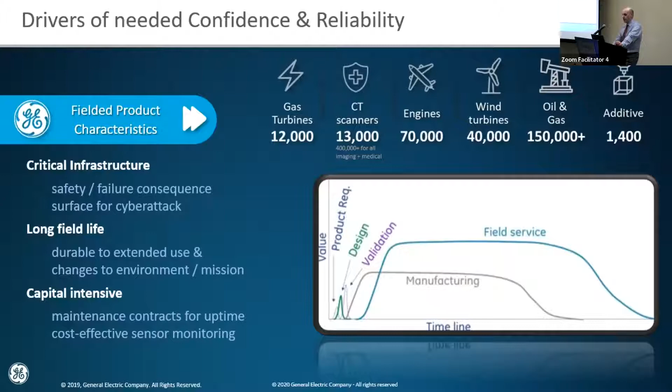These kinds of products are also part of critical infrastructure. So there are safety factors, they're regulated, they have a long field life and are expensive. So when they are not working, there are significant consequences. So we have employed modeling and simulation for a significant amount of time. It is very important, of course, that these not be garbage in, garbage out kinds of models because of the long life, the high consequence, and the critical infrastructure of them.

So I'll talk through how we got to where we are. And we mentioned that one of the ALCC awards that'll be using Frontier is on one of our projects. And I follow these 3 phases: to see, to understand, to predict.

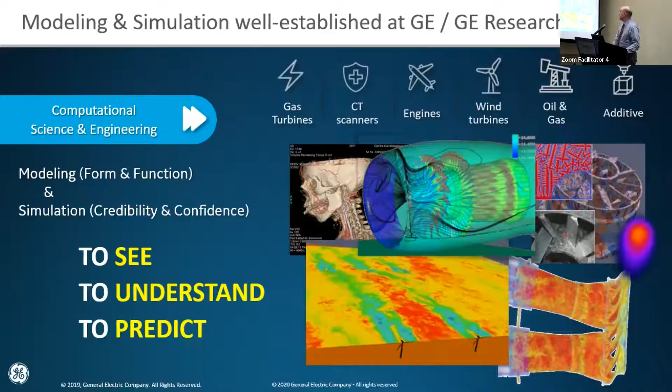Can you go to your second screen and scroll over and close the black bar on that?

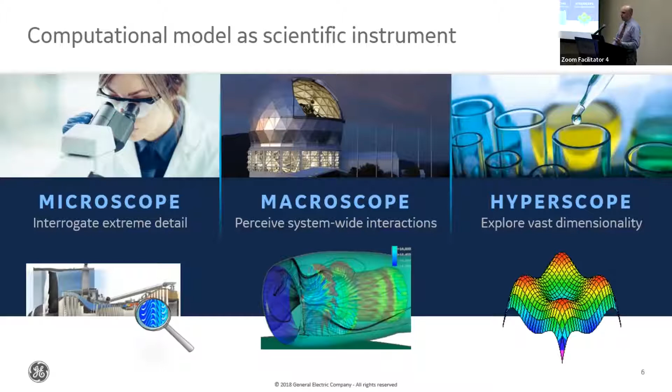All right. So when I say to see, I'm talking about using the computational model as a scientific instrument itself, the same way we'd use a microscope or a telescope, or what I call a hyperscope here, to look at massive dimensionality in ways that our own perception is inadequate.

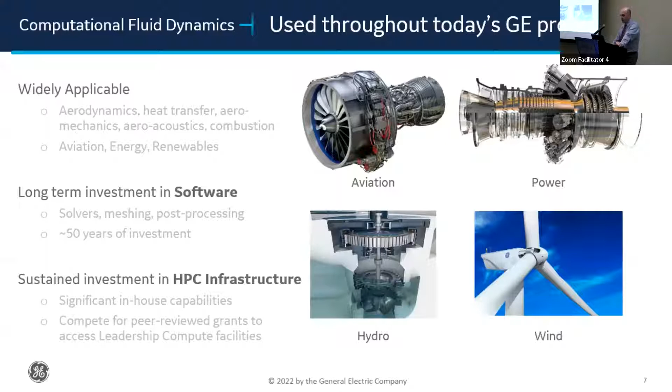And our studies and progress have mainly been in the swim lane of computational fluid dynamics, which apply to, in fact, all, one way or another, of our remaining products, whether it's jet engines, power plants, so gas turbine, hydroelectric, wind, and such. There's a high interest in understanding turbulence and its effects in the operation of that equipment.

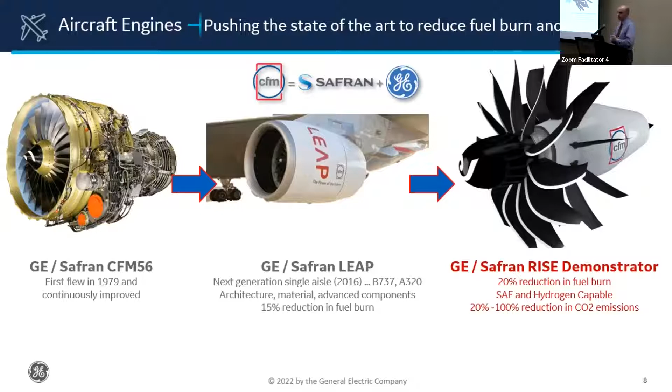Specific to aircraft engines, we have a program that you see on the right here called RISE. I'll talk more about that. That is the successor to 2 very successful engine models. The first on the left there, introduced in 1979, was one of the most used engines in the world, and the LEAP replaced it in 2016, reducing fuel burn 15% from the prior, and we have some very aggressive goals with RISE.

Now, one of the important aspects of this to understand is this is seen as a path to hydrogen. And hydrogen has been one of the priorities that the Department of Energy has declared. But to get the benefit of the zero carbon emissions out of hydrogen as a fuel, there are things you need to address. Right now, in how far you can travel at a given price, hydrogen is significantly more expensive than jet fuel. To get the same number of joules out of it would require 4 times the volume of storage of the fuel.

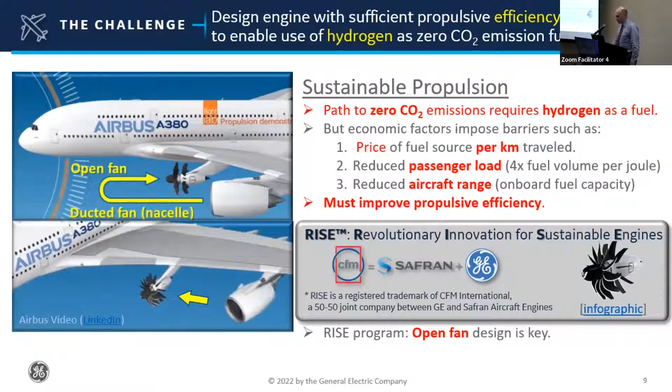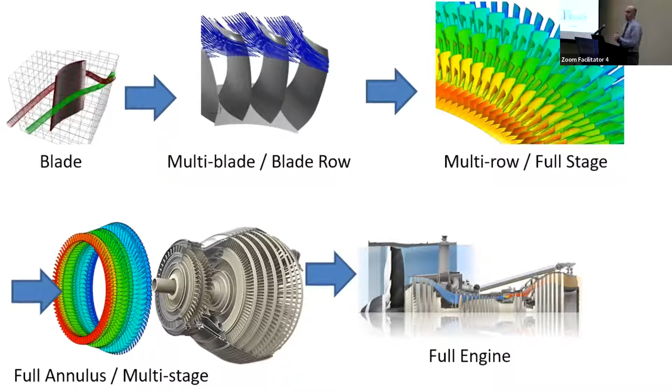Now, at any given time, we've only been able to simulate a problem as large as will fit on a given system. So at the beginning, we could only look at one blade at a time, then expanded it to multiple blades. And really what we care about in terms of the airflow is not the blade, but the passage between 2 blades where the air actually goes. So then we scale up to multi-row and full stages of the engine. We've historically used symmetry, like a 1/8 cut of the full wheel, then going to full annulus, which is the entire circumference. And then the dream would be to do a full engine end-to-end full annulus.

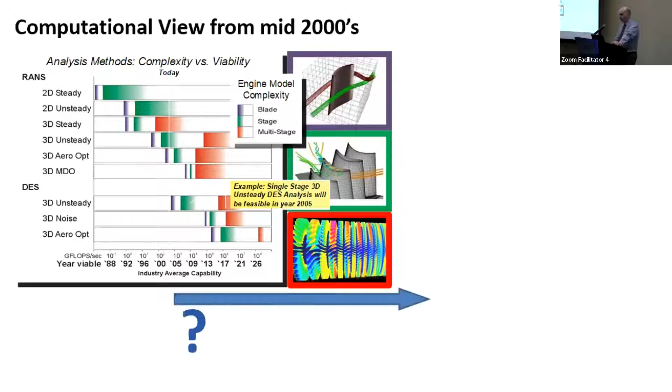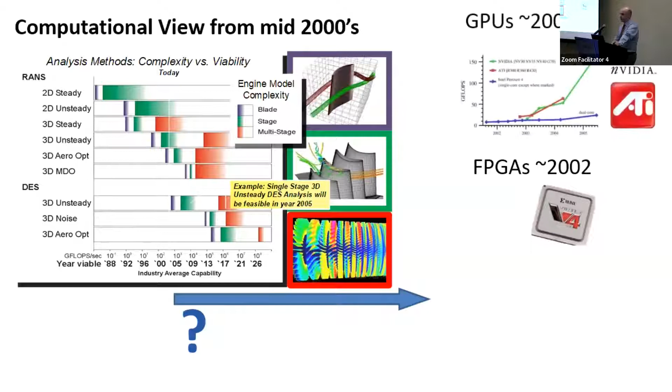But at the time, we didn't know what the path would be to be able to do these kinds of simulations. Now, the group that I was leading at the time was doing embedded systems. And so we were familiar with FPGAs, and we actually had done some CFD kernel implementation in FPGA in the 2002 to 2004 timeframe. There were significant increases in performance that we could get from GPUs. And then the PlayStation 3 was out, and we had the potential of looking at the cell processor.

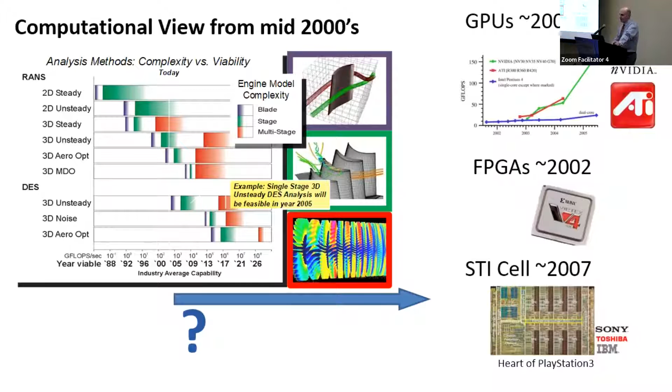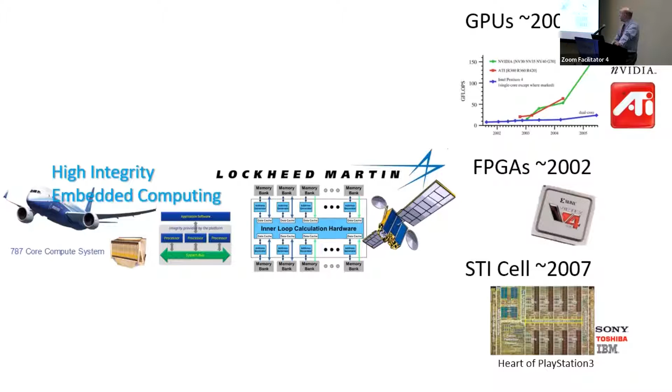Now, GE may have been fortunate in that our group had experience in doing high integrity embedded computing, like the core compute system for aviation, onboard satellite systems and such. So we were using FPGAs for that platform, and we're quite comfortable implementing those, although the process chain was significant. Because of image reconstruction in healthcare, we were familiar with using GPU acceleration.

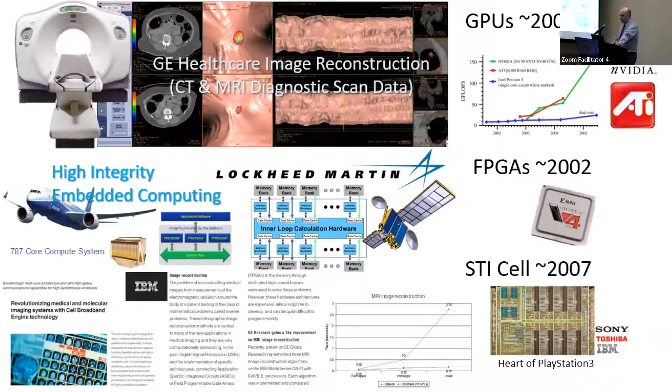And we were actually early in on the STI cell. This article in IBM publication talks about some great performance that we got for it in doing an MRI algorithm implemented in the cell processor. So before 2010, we were already kind of pre-ready for this use of accelerators to get performance, but we had only looked at these in embedded or single workstation kind of scenarios.

Our x86 clusters were modest, and in the high reliability architectures like the Blue Gene, there was a perception that it would be very difficult to port to them, but we got some assistance from Jim Sexton's team at TJ Watson. And I think our port of Tacoma, our RANS solver, took a day. And so that put that to rest. And we were running on the Blue Gene L in Rochester, and then some of the performance improvements started.

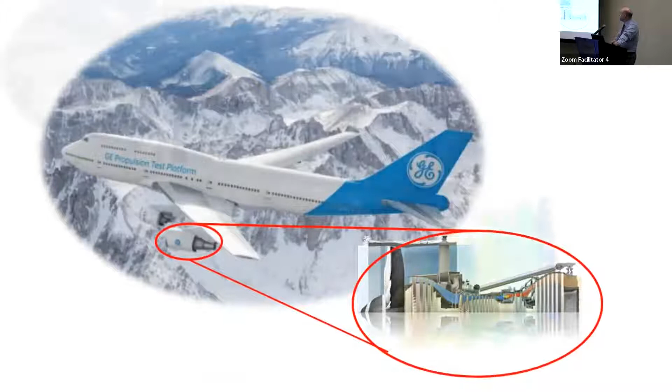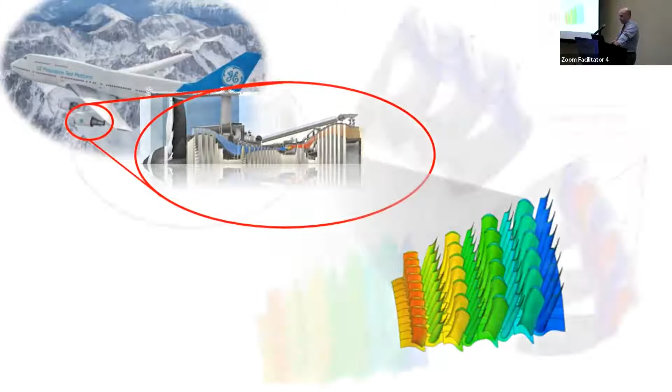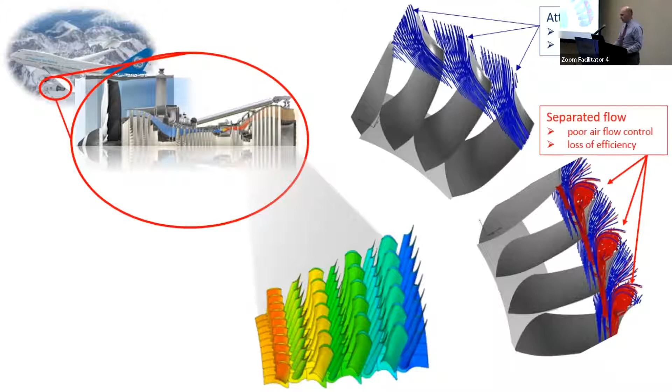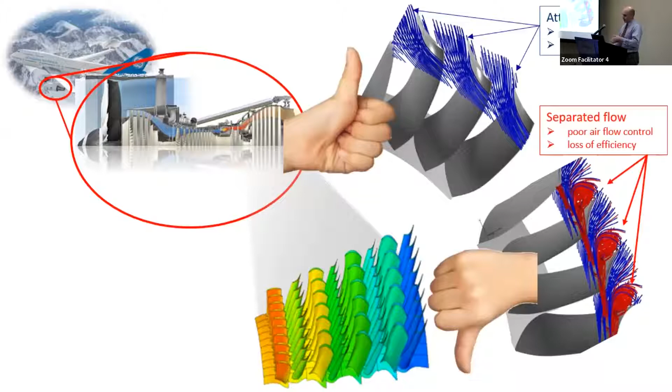So let's go back to the engine here. So the last part of the engine called the low pressure turbine is where we capture all the energy that's being generated upstream. And if we can choose a design that maintains attached flow as shown toward the top, we get high efficiency, whereas with turbulence, as seen in the red, and separated flow, we lose efficiency in the design. And so we run simulations where we want to see if the shapes and other factors that we've selected are creating these kinds of flows.

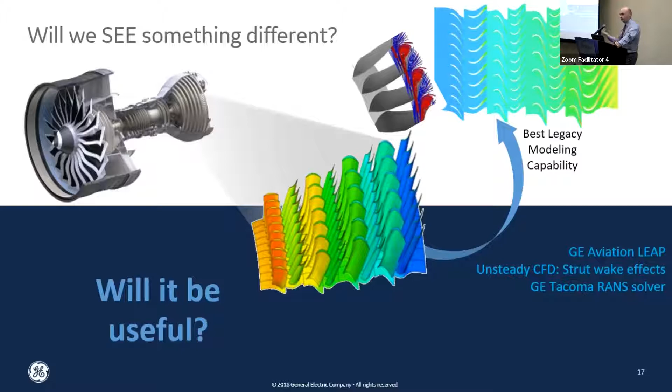And so we wanted to run a Jaguar experiment on this to see if there was anything useful running unsteady computations instead of the steady, which you can see up at the top, which is a time averaged view of what's going on in that stage. So we took this to Oak Ridge, and on Jaguar, we ran an unsteady analysis, and you can just see by comparison the top and the bottom.

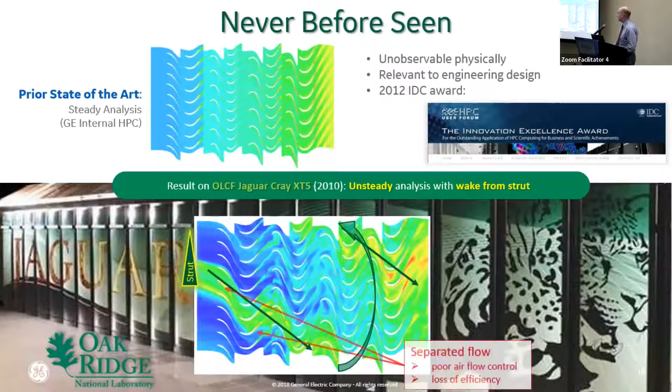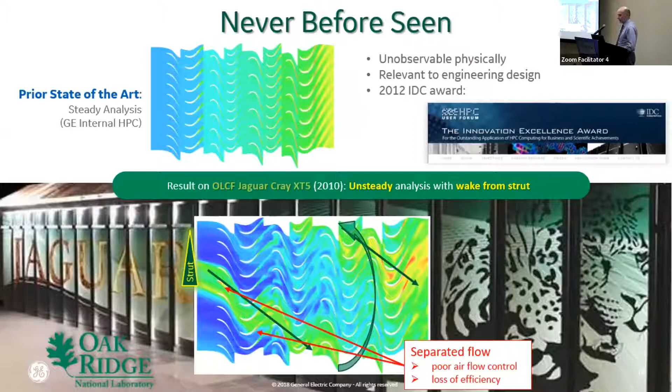What we have here is there's a strut, and behind that strut is this wake, and we thought there's thousands of RPMs going on, that's just going to blow apart the wake from that strut. Not true. With the unsteady analysis, we could see that the strut was impacting things, and we could identify areas of separated flow. And because the initial row is a stator, not a rotor, meaning it is always behind the strut, there were actually design decisions that we could make to compensate for this. So this was seeing something that we couldn't see before.

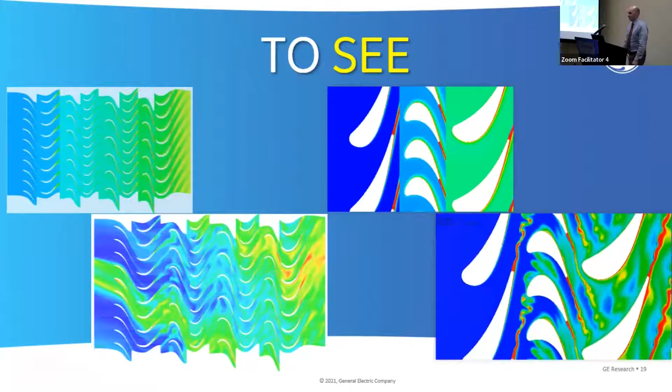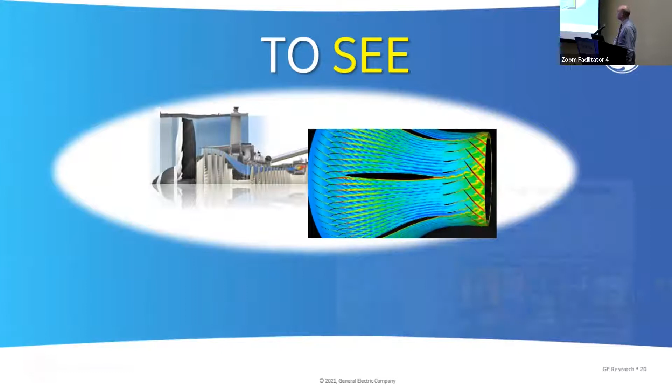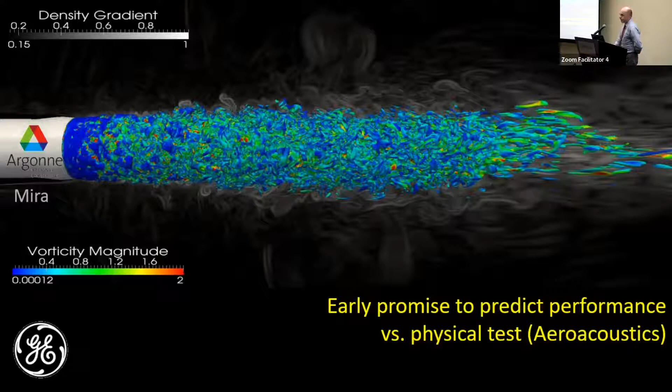So imagine you can use the top half of the slide to design, or you can use the bottom half of the slide, which is more informative here. And this has even gotten more pronounced as we have expanded the scale. So in 2011, we acquired a Cray to be able to do proprietary problems on this. Another early project that was very enlightening, this one done on Mira at Argonne, was in exhaust noise prediction. This was some of the first work that was reproducing physical test data predictively. And this leveraged a code out of the Air Force.

So as far as Exascale, this is a panel in 2011. It was in the basement of the Capitol where I was representing industry, and we didn't really have an Exascale problem at that time. So I'm thinking, what can I actually say? So I changed it to the pursuit of Exascale, and how important the pursuit would be in impacting things where, just as petascale would commoditize terascale and make it affordable so everybody can do terascale stuff, Exascale would do the same with petascale.

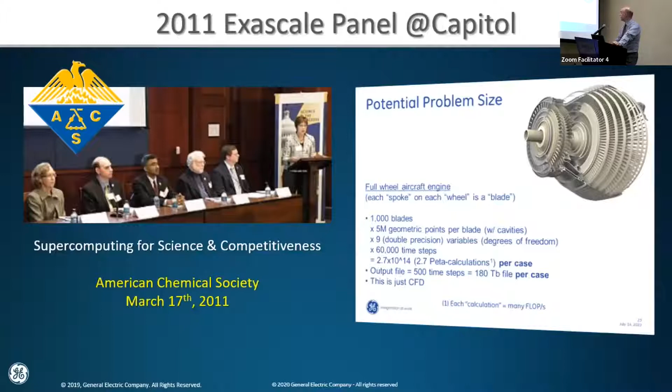But I did add an Exascale-sized problem, but this was completely infeasible to generate at the time. And the barriers in creating industrially relevant problems in terms of the mesh size and detail and validation and such are still an obstacle, and something that I've reached out to several labs to discuss how to address. And I think it's a problem worth more attention.

Another early success story, unfortunately it's a negative success, is in looking at the nucleation or the formation of ice in water droplets. And the interest here was in terms of ice adhesion to things like wind turbine blades, aircraft engines, even subsea oil exploration contexts. And strangely enough, how this actually works mechanically, even though this is something we see all the time, is not deeply understood. And so this was one of the largest scale simulations in the world at the time, and it did give insight. Unfortunately, it was insight that the countermeasures that we were looking at to reduce adhesion would not work.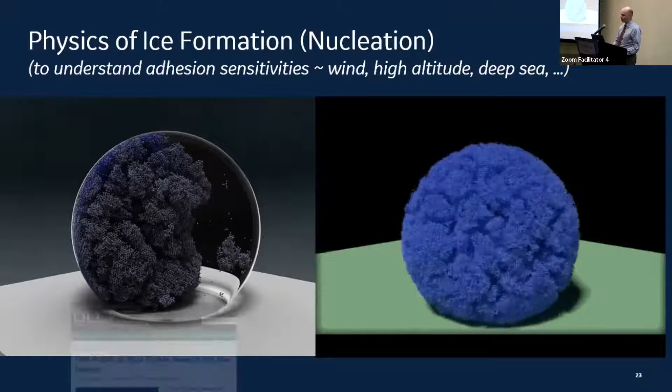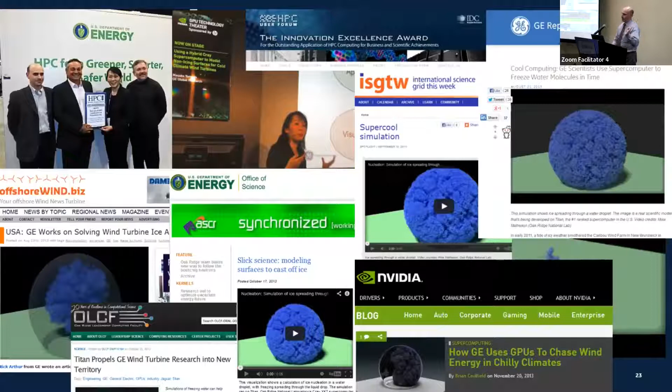But it allowed us to create a lot of interest and excitement around the ability to see this and then redirect our resources elsewhere. And in fact, that story is in the case study that Masako Yamada wrote in conjunction with the brief history, up to this point, that we put into this book that came out in 2015.

So this is kind of the glory slide. Over the years, we've had a number of projects at various labs that have touched on many of the different components within the engine. An earlier version of this appeared at National Lab Day on a live screen. And I think it's a great visualization showing the partnerships and just the power of what you can see.

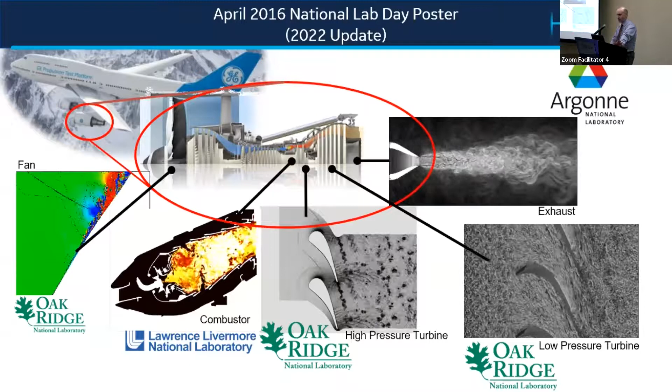So shifting from seeing to understanding. The story that I would next share is around gas turbines. So this is big. This is 500 tons, 39 feet long, 16 feet in diameter, 100,000 parts. We are the largest supplier of gas turbines in the world. And so efficiency on these is of significant impact. And along the way, you also want to reduce emissions, carbon dioxide, NOx, and to a degree noise. Noise will come into the story here.

So while a gas turbine only plant is about 33 to 44% efficient, when you do what they call a combined cycle, where you capture the heat and turn that into a steam turbine, which acts in conjunction, you can push that into the mid 60% range, which for a machine is an incredible efficiency rating.

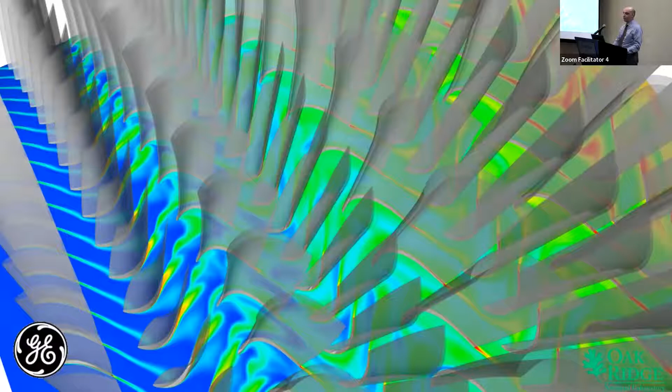So each percent of efficiency translates to 17,000 metric tons of carbon dioxide, or about 3,500 automobiles. And the US combined cycle fleet is about 200 gigawatts. So 1% on that is about 3.5 million metric tons of carbon dioxide. So this is a single point with dramatic potential impact.

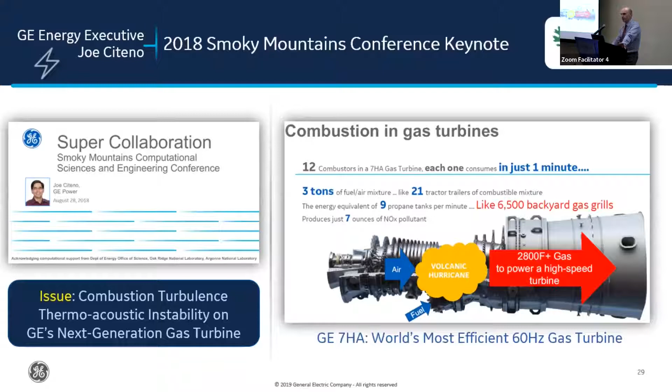So a great story here is one that was told by Joe Citeno from our gas turbine team in the keynote at the 2018 Smoky Mountains conference, where he shared the story of outreach to the national labs toward a predictive model that would have sufficient scale and capability to simulate the system of interest. The problem was, before having access to these machines, we could only look at one combustor at a time. But there was an interaction between multiple combustors that was creating some problems in the design that we would only be able to see once we were able to simulate multiple combustors.

And so we received assistance from the labs, and you can see in this diagram, at least that they look different, not being a mechanical engineer, from the unstable to stable. The design change was moving one hole, a fuel hole, by 0.1 inch. So having the ability to see this and understand the impact is a key part of the value that comes out of this.

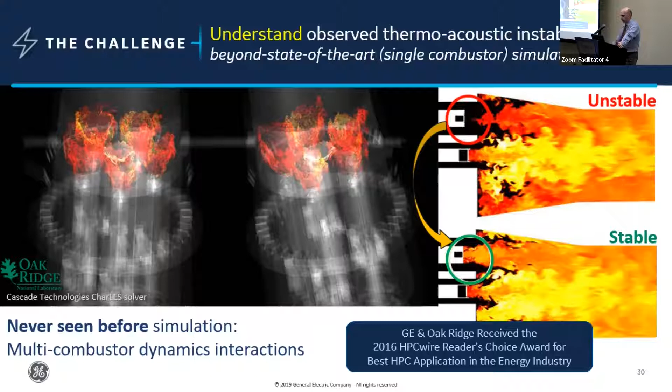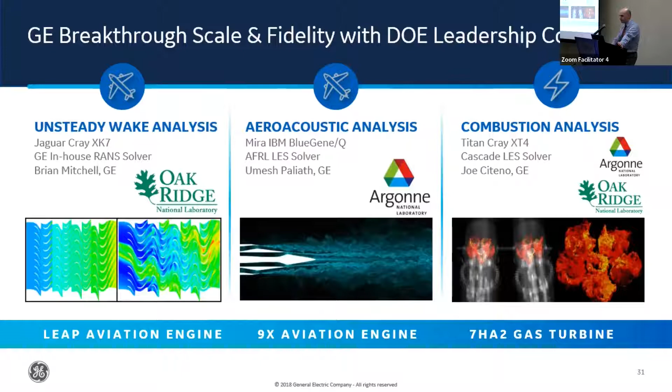So we had started to build this portfolio of great projects with impact. And I definitely would say Susie and David in the back of the room were key partners in getting us engaged and making parts of this happen. So, now bought in, we started expanding these partnerships. This was looking at wind farm scale simulations to start to get an inkling of the effects of wakes downstream, and we're going to come back to that.

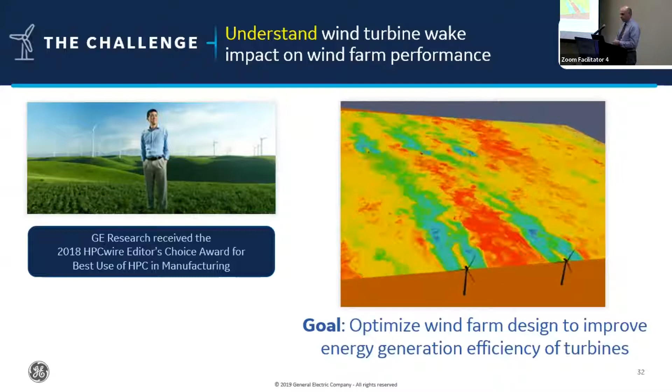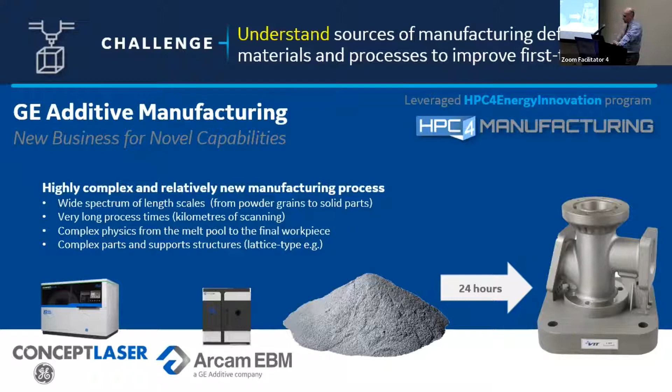We had additive manufacturing, which was becoming more prevalent. So you take metal powder and a laser that will melt it, add powder, next layer, next layer, next layer. And this became so critical to our aircraft engine business that we actually bought the 3D printing companies there on the left, Concept Laser and Arcam. And so now we're in the metal 3D printer business as well, with ourselves as our primary customer, but with others as well. So understanding materials and the grain structures in the process, and we've leveraged the HPC for Manufacturing program in looking at this.

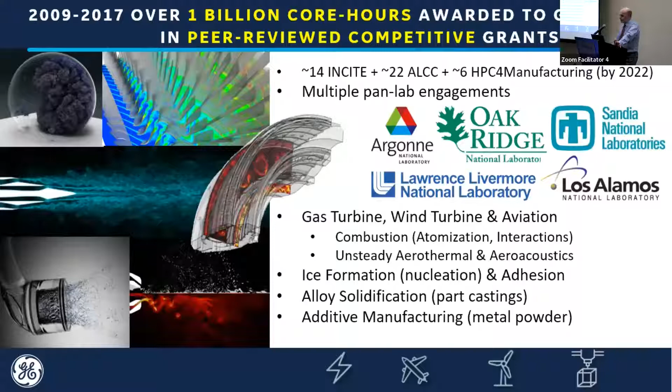So by 2017, in peer-reviewed competitive grants, GE had already used over 1 billion core hours on the National Lab machines across a number of the labs. And by today, that's 14 INCITE Awards, 22 ALCC Awards, 6 HPC for Manufacturing, and other directors' discretionary grants, et cetera. But we recognized all through this the obligations that we had also to give back and to keep pace with things like the INCITE scalability requirements.

In 2019, at the Exascale annual meeting, I put together the poster on the left, and this is just zoomed in to show some of the aspirations that we had for Exascale, including multi-scale wind turbine interactions, the inlet distortion flow. So this is where you have aggressive crosswinds to the flow.

So it's not like a uniform, I'm flying into a headwind sort of thing. And multi-scale material modeling. But this one here remains a big challenge, which is combining, once again, I talked about modeling just the combustor or just one combustor,

linking the simulation of the combustor with the simulation of the turbine that follows it. They have different geometries that they have to hand off, as well as different physics that are of interest. And so today, those are boundary conditions as a handoff rather than a coupled simulation, but it's pretty intuitive that there are insights when we can actually combine these.

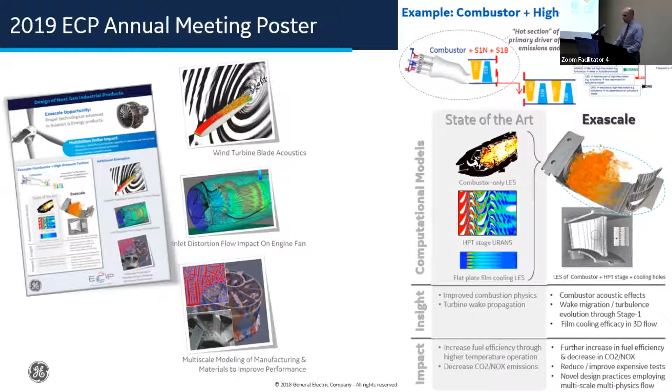So getting to the recent awards that we've received, this ALCC award, and this did have an update, so it was renewed, was looking at the impact of coastal low-level jets. So in the natural thermal cycles of the heating of water versus the heating and cooling of land, along the coast, there are these jets that have a distinct non-monotonic velocity profile that will hit the wind turbines. And it's not an effect that is universally seen, but it is prevalent in the East Coast of the United States.

So in the New York Bight installation that was going up, we wanted to understand these effects so that we could predict what the performance of the wind turbine farm would be, and understand the reliability of the operation and such. So that's one aspect of this. The other is in terms of the wakes now.

Believe it or not, the wake effects downstream can span over multiple kilometers and can reduce the efficiency of a downstream wind turbine up to 40%, and also potentially increase the out-of-plane loads on the turbine of up to 40%. And so a lot of the design is idealized turbulence, not realistic environmental conditions. And there is no wind tunnel that you can put a wind turbine in to do this. So this is the only way of being able to see these sorts of things.

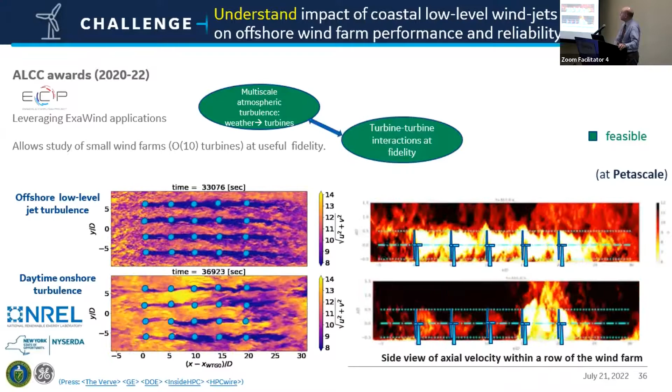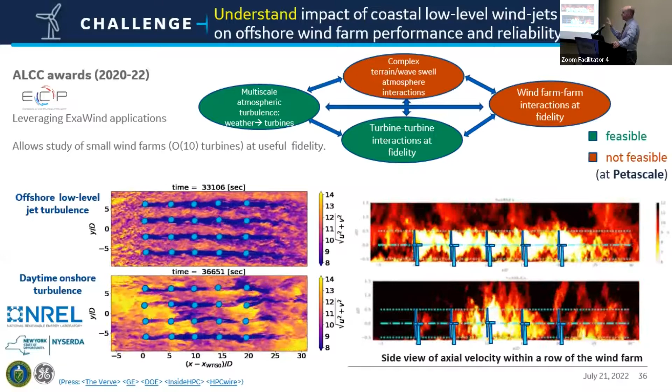So feasible at petascale, we have the atmospheric turbulence, the impact of weather on the turbines, turbine-turbine interactions at order 10, so basically a single farm, but still not able to do things like complex interactions with wave swells and more complicated atmospheric phenomena, and then interactions between wind farms, which, just put a pin in that for a second.

So switching to the predict phase here. So we're at this current status in the diagram with these infeasible solutions. But with Exascale, we believe that the wind farm interactions become feasible. So here, these are two wind farms in the Baltic Sea that are tens of kilometers away from each other, and the wake from one farm will impact the incoming profile of the other farm. And this greatly increases because of the number of turbines that are participating, but also the overall scale of the problem. It may also open up some of these other atmospheric conditions.

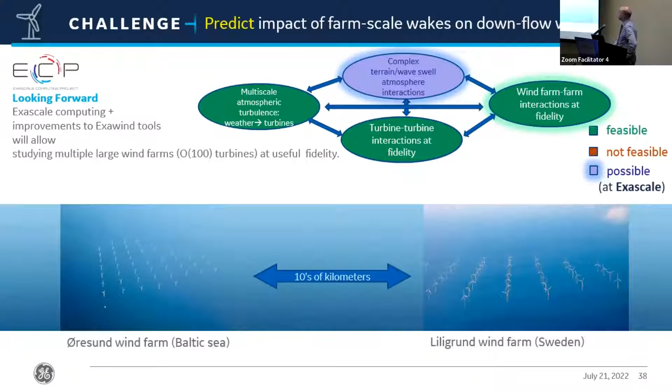The second ALCC program was trying to understand some of the flow physics that impact engine design and are relevant to the other stuff we'll talk about. So going from a laminar smooth flow to a turbulent flow, which would reduce our ability to capture the energy, reduce performance, and potentially create what they call flutter, which is a noise. It's like a standing wave in the system.

We needed to look at how far up do we push what's called a Reynolds number. The Reynolds number is a function of viscosity in how you're modeling the fluids. And especially if we were going to employ the results of these simulations as a training set for surrogate models, we needed to know if we were extending this into the region of sufficient fidelity to encompass these kinds of effects. So this study was just looking at what are those tipping points in terms of the sensitivity on that, and this is in the high pressure turbine.

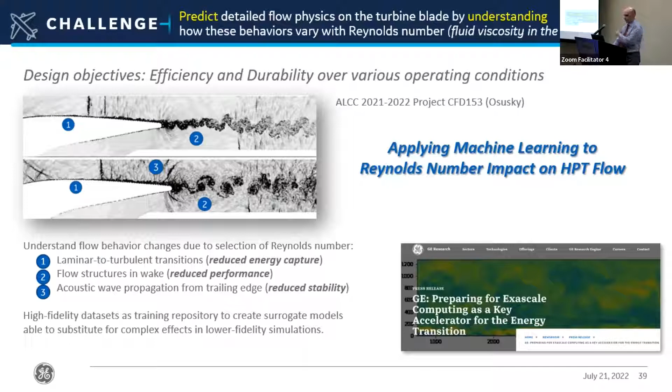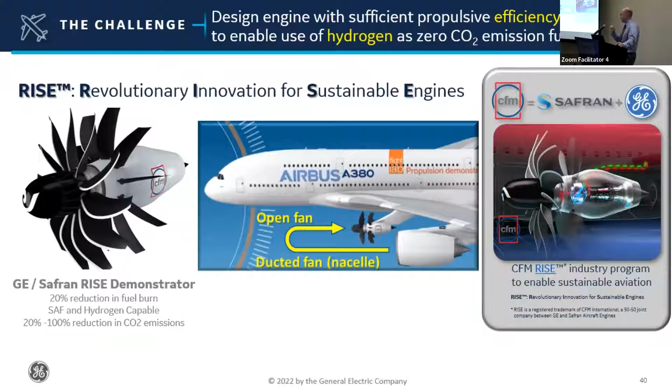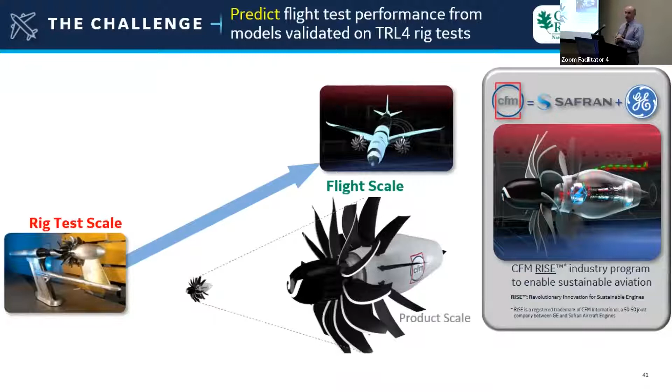And this is something that is probably not well known. So before we can run a flight test, we run a rig test. This is typically done in a wind tunnel, but these wind tunnels are smaller than the actual product. And this is how big a difference that is. Now, so we build this tiny version that will fit into NASA's wind tunnel.

And the relevant Reynolds numbers for the airflow of the small engine are significantly lower when compared to the fans that you see in the full product. So there is no wind tunnel that we can use to test the design at the product scale. So that is not tested until the flight test.

And we have to try to sell these things. So we need to at least bracket what its performance will be post-certification when we haven't even done a flight test and such. So we laid some foundation for this with the 2021 INCITE, and this completed the first of a kind, well-resolved large eddy simulations of the full 3D open fan at high Reynolds number. And this was still at rig test scale.

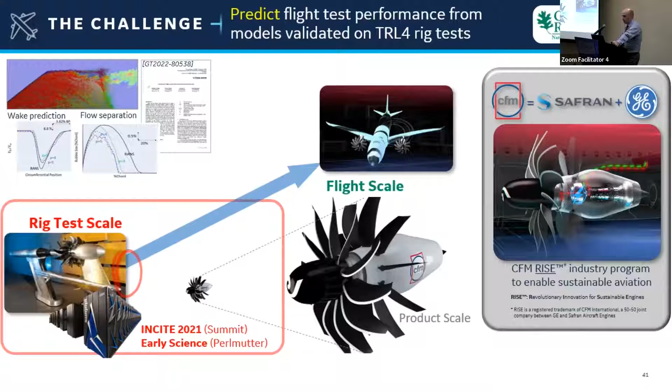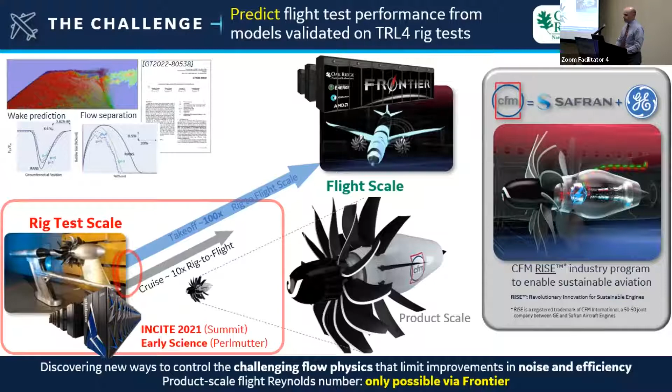And cruise is significantly simpler because it's more steady than takeoff conditions, which have a lot of dynamics to them. So if we wanted to perform these same kinds of simulations at the flight scale, we would need a much bigger machine. And this is where we approached Oak Ridge and ultimately put into the ALCC program on this proposal to leverage basically everything we could possibly get access to. And so the ALCC award was on Frontier and Summit and Perlmutter. And you can bet that if anybody leaves spare hours available, we will be eagerly seeking to scoop those up.

So just as a comparison, to run the takeoff test at the rig test scale, that simulation would be about 70,000 node hours on Summit. That same simulation at product scale, so the flight scale, is over 6 million node hours on Summit. So we love Frontier.

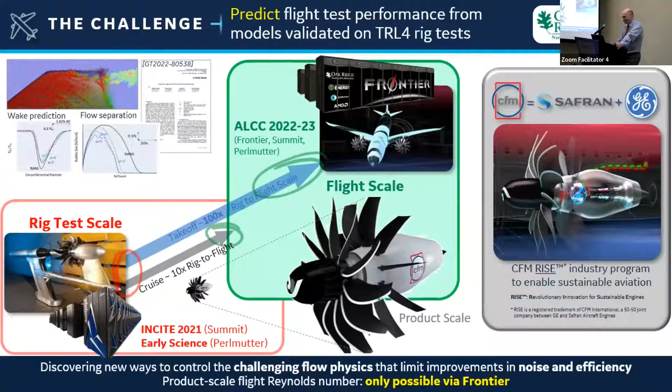The other potential approach for being able to leverage greater value out of this is thinking about the ability to save the results of high fidelity simulations as storage has become affordable and abundant. Rather than doing an optimization where we're just throwing out things that don't meet our objective criteria, we can keep those results, because maybe our objective criteria are wrong, and employ that as a data repository for machine learning for surrogate models. However, that repository needs to be very precise in where it is relevant to use. And if it is insufficient for the problem of interest, you can run some more high fidelity simulations, expand it, retrain, and employ the new technique.

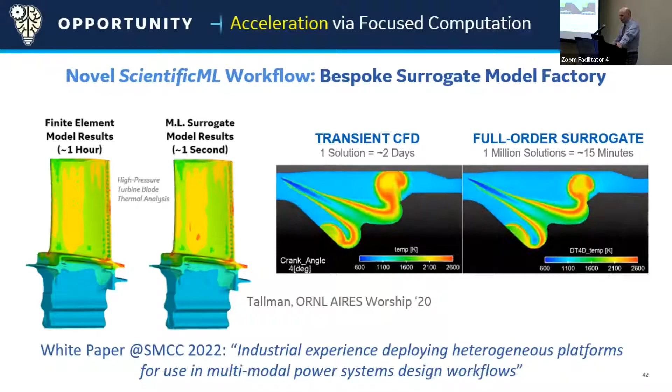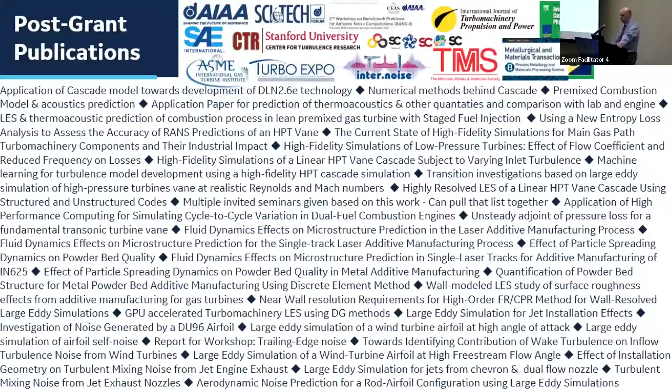And speaking of that, along the way, one of our obligations is publication. So out of the awards that we've made, and you can see some of the institutions on the top, there have been many white papers that have come out of it. In the recent awards, this is a list of those publications. And again, understanding the obligations and what's at stake, and how to make sure that you guys are getting the support and the messaging you need.

There is this track record all through of GE having a sustained and consistent support and shared vision with the Department of Energy in the pursuit of Petascale, and now Exascale, and the value of leadership computing facilities, but also the talent at the computing facilities and the ecosystem that has been built around those. We do want to say thank you for all of that.

The flow has really been looking at the DOE being out in front. I usually say paving the road of understanding and bringing into feasibility the state-of-the-art hardware, which we can then select from to tune to our particular needs. Us doing feasibility studies that are out there still in the low TRL science realm, where internally we will then take it and do validation and production, proprietary kinds of workloads, building out the scalable libraries and software applications that we can adapt, if not adopt, and apply internally.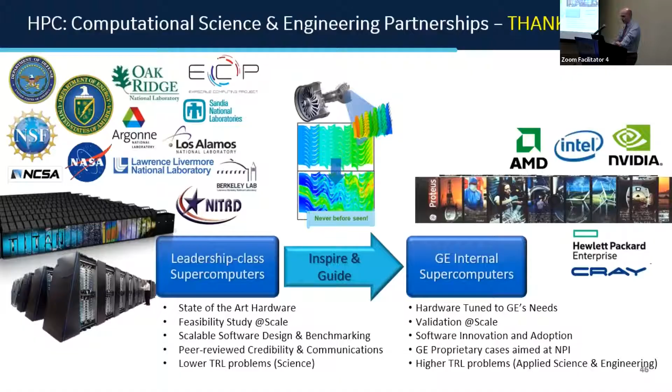So the GE tagline for now is building a world that works. These are serious, life consequential, critical infrastructure kinds of products, regulated, and so that presents obstacles that maybe others do not have, but it is the guiding central vision of the company. We are, as you probably heard in the news, splitting into 3 companies, and every indication I have is that GE Research is still going to remain a central research facility to those 3 companies going forward. But that's a story that I do not think has been really told in that fullness previously.